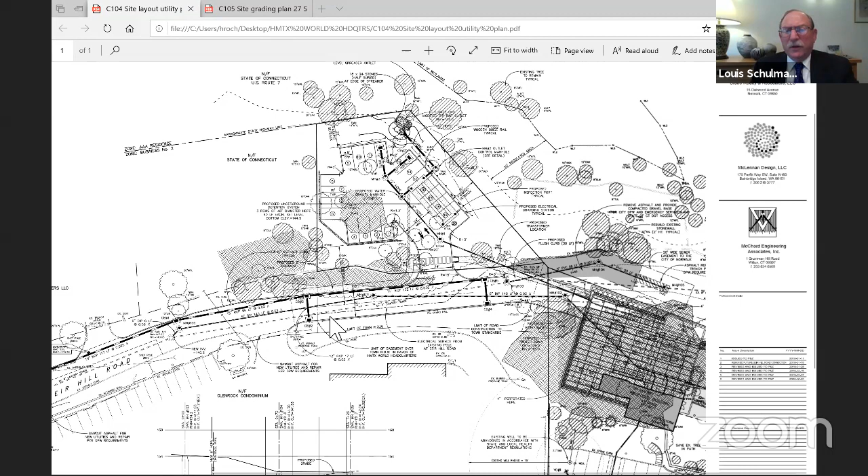Let me stop you, I don't know if other people are having the same issue. I'm not seeing your cursor. I agree. You might be able to change the color. Okay.

While Harry's trying that, I'll just orient you a little bit. Seir Hill Road runs from the left side of your screen, and then it continues north toward the right side of the screen. The roadbed ends on the left side of the screen, and we would extend that roadbed to a travel way that would come up all the way past the entrance to the parking lot. So that roadway is in the middle of the screen, if that makes it any easier to understand.

Harry: Right, and I don't see any options to change the color, so I'll just explain as I go. As Liz stated, the roadway does end right where the entrance to the condominium complex is on the bottom of the screen, right where it says CB2 and CB number 3. So we'll be extending from there to the arrival court of the HMTX World Headquarters building.

With the entrance to the 20 space parking area, we'll be providing turnaround for trucks and emergency vehicles, greatly improving the hammerhead turnaround that currently exists at the terminus of Seir Hill Road.

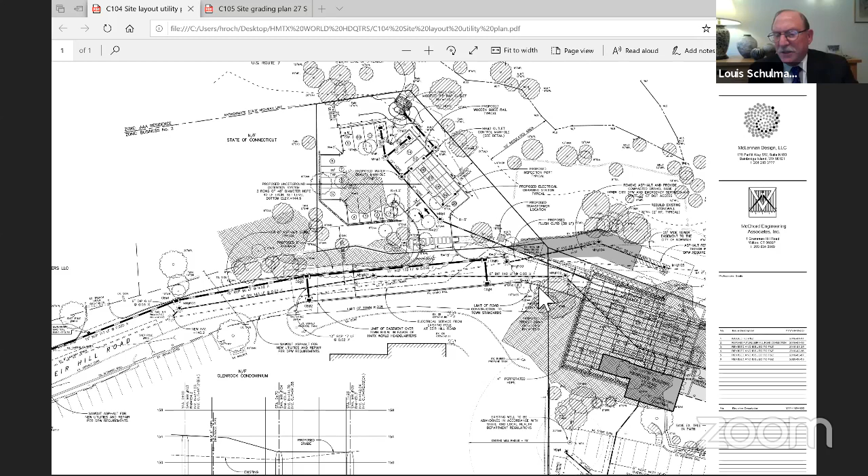Is there a grade separation between the new parking area and the Innovation Center? I'm sorry, what was the question? Whether there's a grade separation between the parking lot and the building itself. A grade separation, is that what you said? Yes, is the parking lot at the same grade as the building? Oh, no, it is lower.

As you approach the building, there is sort of a ramp up to the arrival court. And I could give you the elevations here: the building is at 160, and the parking area is at 150 to 152 as it slopes to the lowest point.

Also, along the same lines, we will be extending Seir Hill Road. It starts at elevation 150, and then as it approaches the proposed arrival court, it climbs up to the 158-160 elevation. There's a bit of elevation change as you approach the ridge on the 15 Oakwood Ave property where the building sits.

I'd also like to know whether Seir Hill Road will be public or private. Maybe Liz can expand on this. There is an easement that the roadway will be in, and a portion of it will be designed to city standards, so I believe it will be public for the most part, but Liz could confirm or correct me. We're working on the details, but we're contemplating an easement over a right-of-way that will be constructed to whatever standards the city wants for this type of roadway.

As far as it being an extension of the public street, the city will have the ability to come up, plow it, and we'll give it access and provide snow shelf areas. We're working on the details with DPW as we speak, and we should have those resolved along with the easement agreement and an easement map.

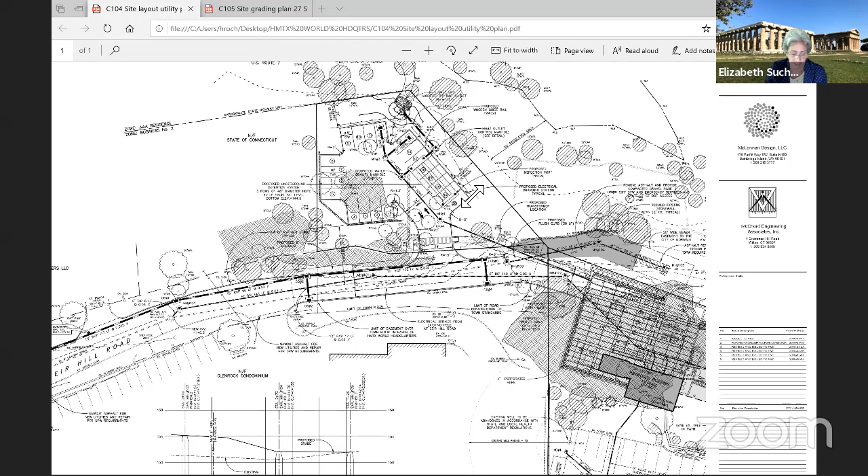So maybe at this point, could Dale or Brad come on and walk through briefly the modification changes to the Innovation Center? They're minor in nature—in addition to eliminating the parking deck, there's some revision to the configuration of the front entrance courtyard, some additional footpaths, changes to the raised boardwalk in the rain garden area, and some minor exterior elevation changes. I'll let Brad or Dale walk you through those, but feel free to interrupt and ask me any questions. Thank you, and I'll stop sharing my screen now so one of them can share theirs.

Thanks, Liz and Harry. This is Brad Banky, an architect from McLennan Design. We are the architect of record for the project. I will share my screen—let me know if you can see this, please. Yes, okay.

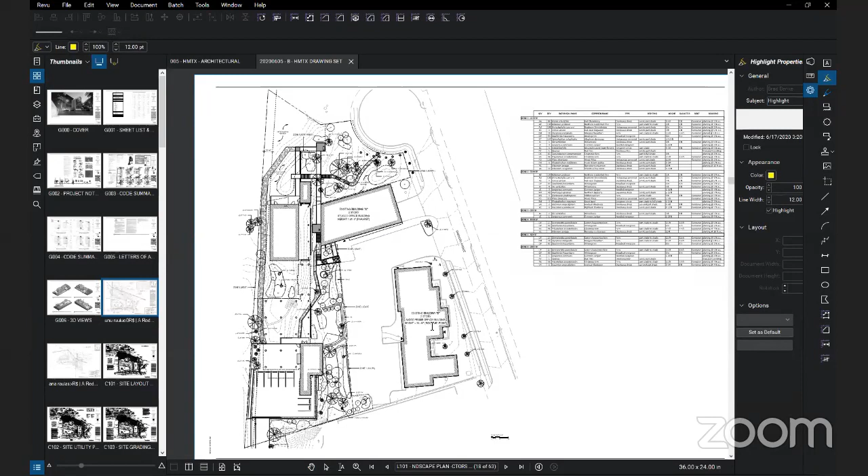So as Liz mentioned, since the last time you looked at this, there's been really minor changes to the building itself. Most of the significant changes have come to the site with the addition of the new parcel of land and the parking lot. Our building is oriented with north at the top of the screen now. These are two existing buildings on the property, and the new facility is located on the west side. The major difference on the main parcel is that the previous version had a circular turnaround as a front entrance plaza—we now show a rectilinear entrance courtyard leading down to the south to the additional extension of Seir Hill Road and the parking lot.

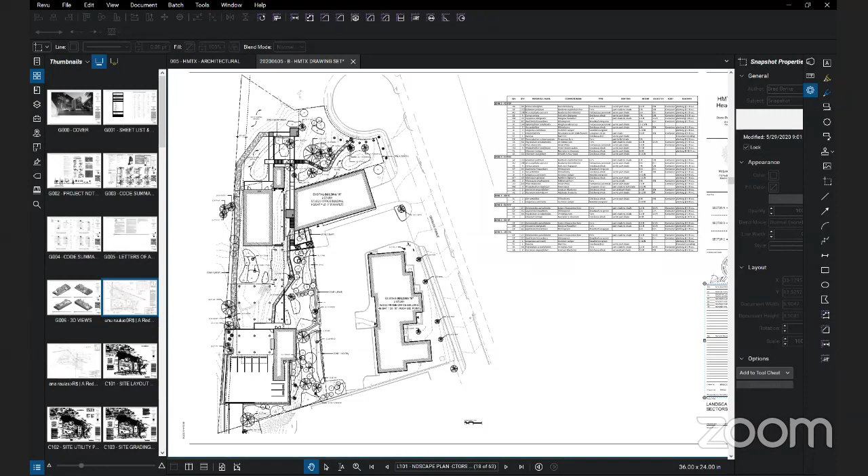There are minimal updates on all code related issues. The building height and average grade has not changed since the previous submission. Another significant site change has been the addition of site footpaths. Due to building code and egress requirements, we have a footpath that exits the building on the north side, and we also have fire access requested by the local fire department on the west side of the building so they can throw ladders there, while fire trucks would access from the east existing parking lot and the new south entrance plaza.

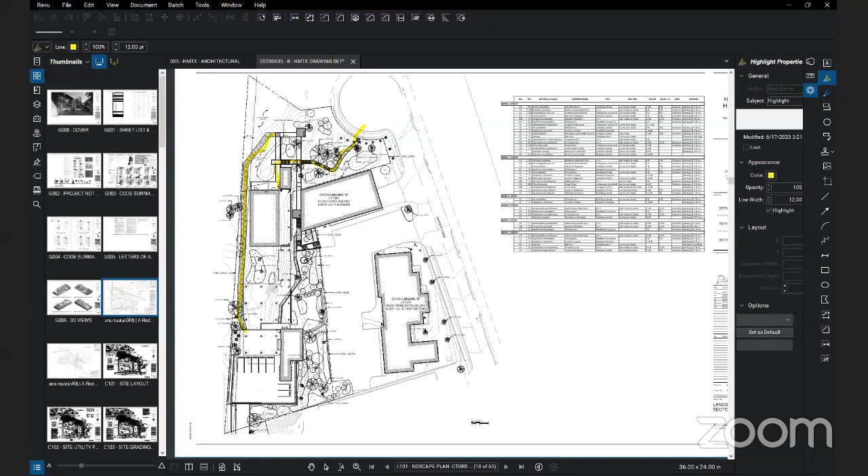Also, just minor landscape updates. The landscape design for the main parcel has pretty much not changed other than the addition of the footpaths. The new landscaping for the parking lot and the landscaping for the main property are pretty similar. We're preserving as many significant trees as we possibly can, removing several invasive species, and generally creating a beautiful, lush new landscape with native trees, plants, and pollinators.

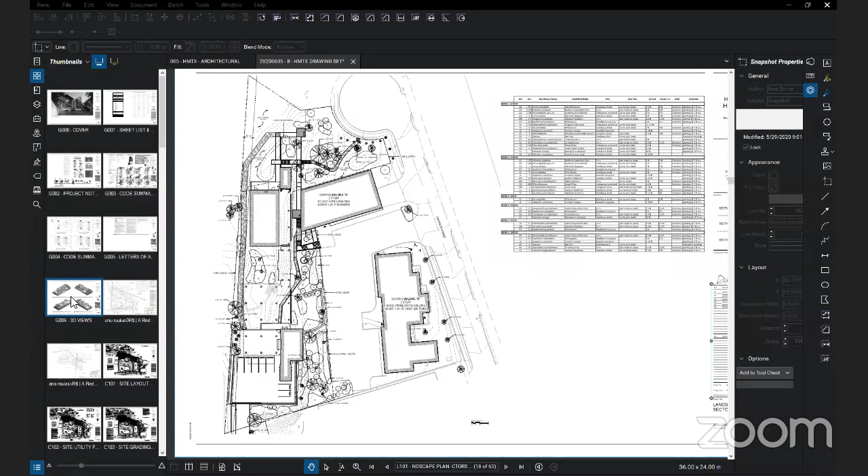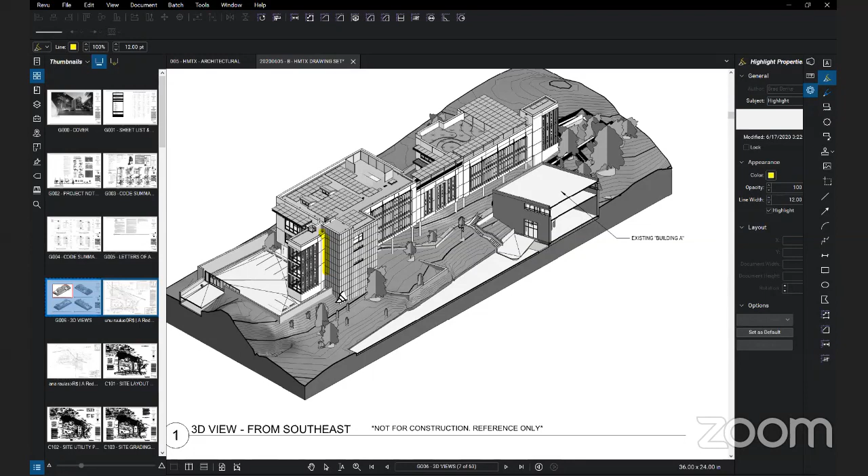The actual architecture of the building hasn't really changed—standard development to meet building code and coordinate with mechanical and electrical disciplines. The only exterior change worth noting: this is the building again, if you haven't seen it for a while—4 stories tall, spanning northways across the site. It used to be an entirely stucco building, like a white sand texture; now a portion of the building will be stone cladding. That's really the only significant exterior change.

We've added some details if you're curious to look through—the roof equipment screen, several exterior details for the rain garden, enlarged plaza plans, and lots of site features and details that I won't pull up unless there's a need to. We've also updated our electrical lighting and site lighting plans.

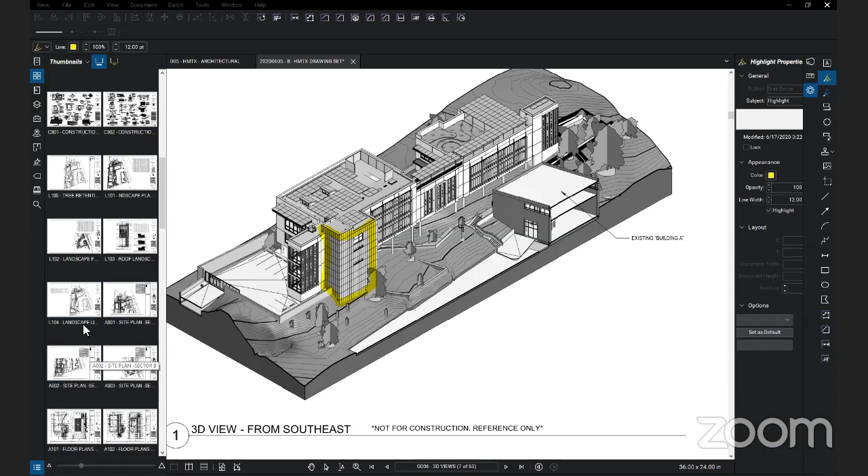One of them is on sheet L104 for the main property. Completely zero foot candles of lighting power spilling at the property edge across both parcels, so there's no light spilling off the site. And then the south parcel is on sheet E052.

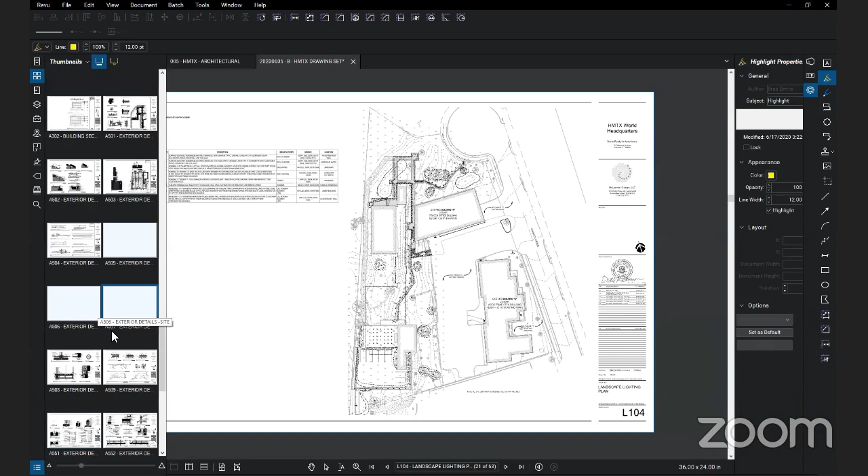Again, pretty basic site lighting plan with a couple poles and some smaller lights in the parking lot, again with zero light bleeding over the edges with full cutoff fixtures. The lighting plans are in the drawings as well as the electrical cut sheets to show the specific fixtures, if anybody has specific questions about those.

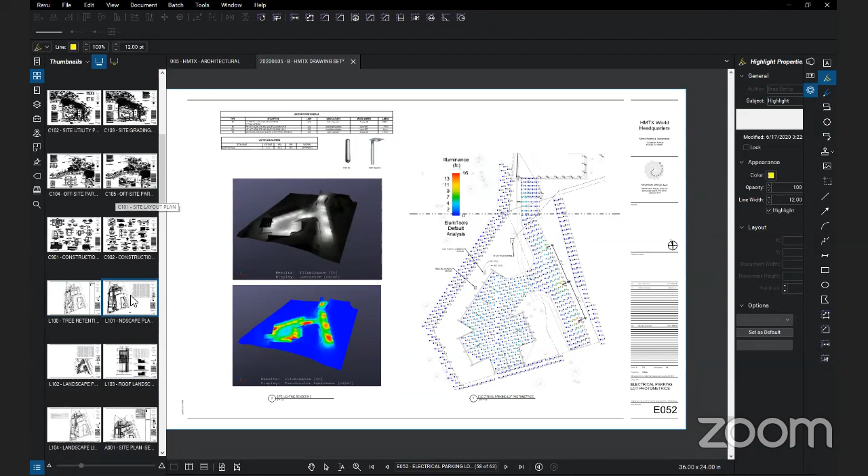That's pretty much the significant changes, but I will certainly answer any questions that might come up. We're really excited about this project, so thank you for your time. Questions from the commissioners? We don't have anything else to add or anyone else who is going to make a presentation this evening, but if you have any questions, happy to answer them.

From my perspective, the issue here is the community. As you know, when this was first presented, the commission was really very excited about it. The changes are more than nominal, so the question becomes: should we give the community another opportunity to speak about the project? And the fact that you were only contacted by one person after mailing out the information may suggest that there's limited interest, but I'd like to get feedback from the commissioners regarding that.

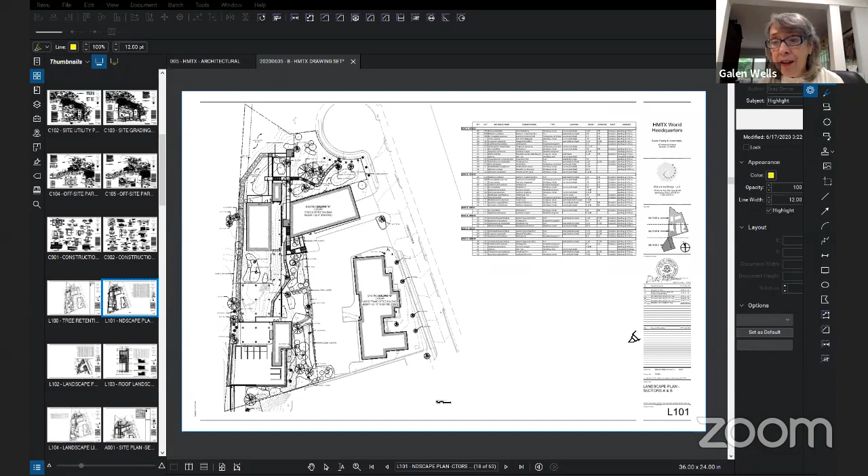Again, we have the authority to approve these things this evening and allow them to move forward. We also have the right to require a public hearing. My opinion is that these changes improve the plan. I think the parking lot is an improvement over the previous parking structure. It looks like the plan is improved. I think we could go ahead and approve it without a public hearing.

I agree with Galen. How much time was given to the public to comment? As I indicated earlier, the first set of mailings went out within 10 days of the initial submission back in March, so that was around March 19th, and I didn't hear from anyone. Then the latest set of submissions, which were filed around June 5th, the letters went out shortly thereafter. So the fact that I received an email and a phone call on Monday suggests to me that folks knew about it at least the weekend before.

In response to your comments, Mr. Schulman, while I appreciate the fact that the commission has discretion to hold a hearing, I call your attention to the fact that the parking lot fully complies with all of the requirements of the zone in which it's situated. Since it does, the commission has limited ability when faced with a site plan review application, if it fully complies, to do more than approve with conditions. I certainly wouldn't want to hold out hope to the public that by holding a hearing, a parking lot for 20 spaces could somehow be denied. I don't think it could be, I could be wrong. And I do agree with Commissioner Wells that a parking structure in between building A on the plan in front of you and building B is more intrusive and impactful than a parking lot for 20 up at the end of Seir Hill Road. But it's true, it is your discretion to do what you deem most appropriate for the neighborhood, and whatever your decision is, we certainly will abide by it.

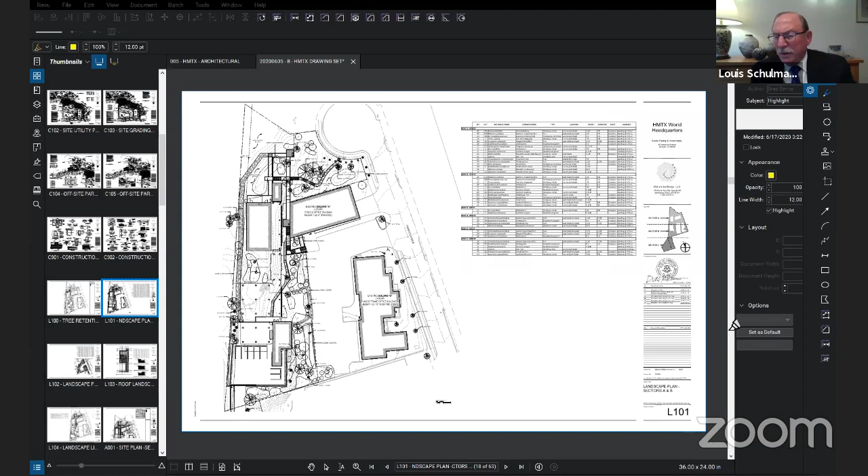Other comments from commissioners? Well, as it says, the applicant reached out to the public in March and in June, and they didn't get a lot of feedback. I don't really see any need to do a public hearing. The only question I have is for the second round of communications, was it clearly noted what the specific changes were so that people could clearly understand what had been updated?

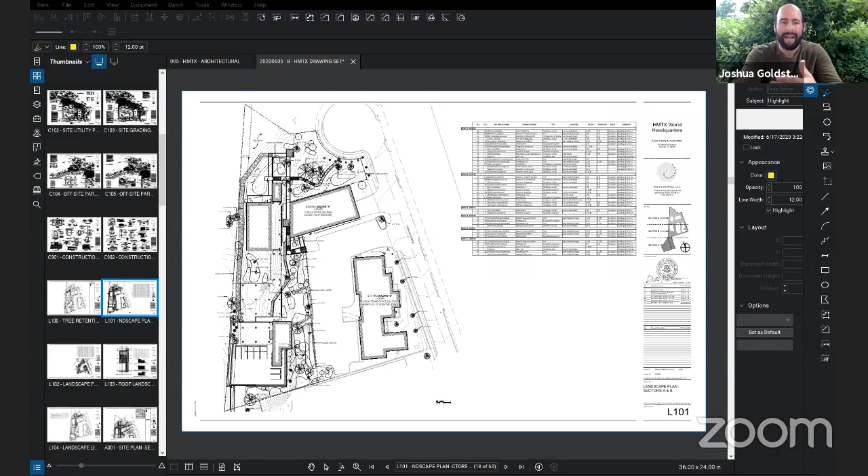I'm talking about the respective mailings. Was it clearly delineated what the changes were in a way that was easy to understand for people? I can pull up the letter if you give me a minute. But to explain, it was indicated that a site plan review application had been filed for a brand new parking lot for 20 spaces, with minor modifications to the building that had been approved 2 years ago.

Great, thank you. Steve, Liz, did you get any feedback from anyone regarding this meeting? No, we have not been contacted. As Attorney Suchy stated, we have all the application materials up on the city's page under a folder specifically titled for this application, as well as several other applications. No feedback, email, or phone call.

I would be prepared to vote, although this is really probably not minor in a sense to be considered as minor. I agree with Galen that it's an improvement. I think we all felt when this was presented to us that there was definitely a distinguished piece of architecture, and I think we'd like to see it go forward as soon as possible.

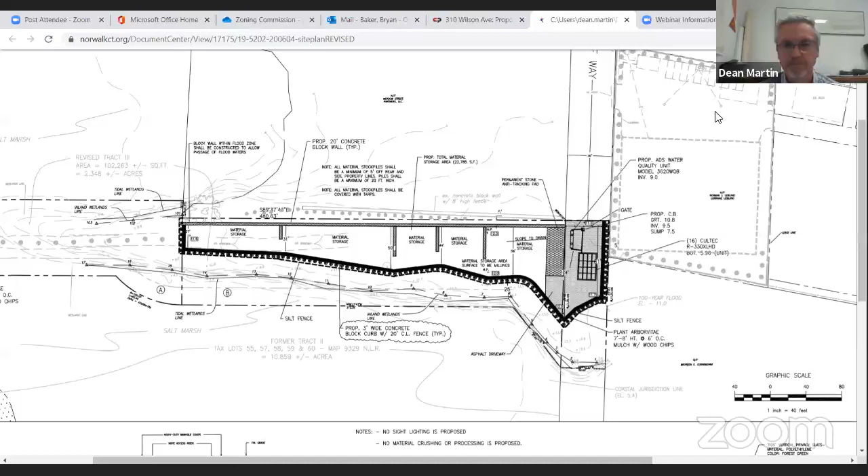Questions from commissioners? Commissioner Schulman, if I may, Dean, could you just chat about your interaction with the representatives of DEP? Sorry for interrupting, just wanted to make sure we got that on the record as well. Yes, yes.

Based on some comments from John Goucher from the DEP, he was inquiring as to whether any below-ground soil testing was performed in the area where we're proposing to install our stormwater retention system. We did do test holes and some permeability testing in that area, and that information was passed on to Mr. Goucher, and it appeared to be everything he was looking for. I did receive correspondence from him late this afternoon, and he has some suggestions about potentially installing select fill below our retention system to improve the soil permeability.

Attorney, at this point have you contacted the neighbors? Since an application for special permit and CAM was filed, we are required to notify neighbors, and those neighbors were notified in March when the applications were initially filed. To date, no one has contacted me. But since this is a special permit, a public hearing is mandatory, and we will of course be notifying neighbors once again within the requisite time period prior to the date of the public hearing.

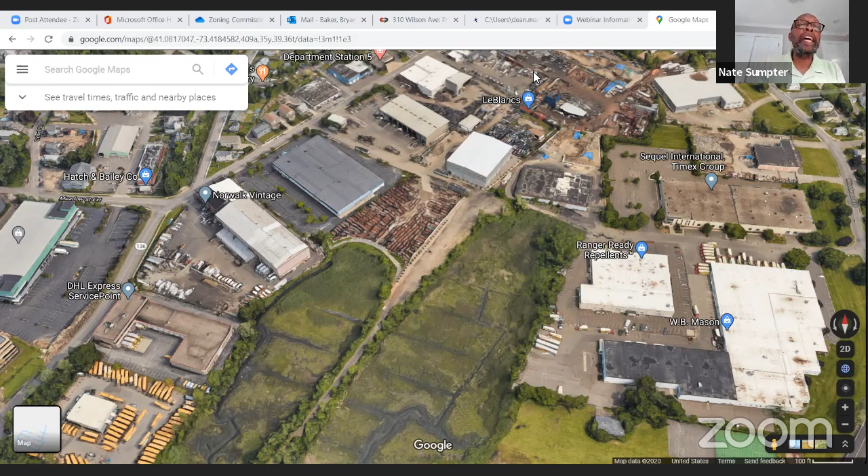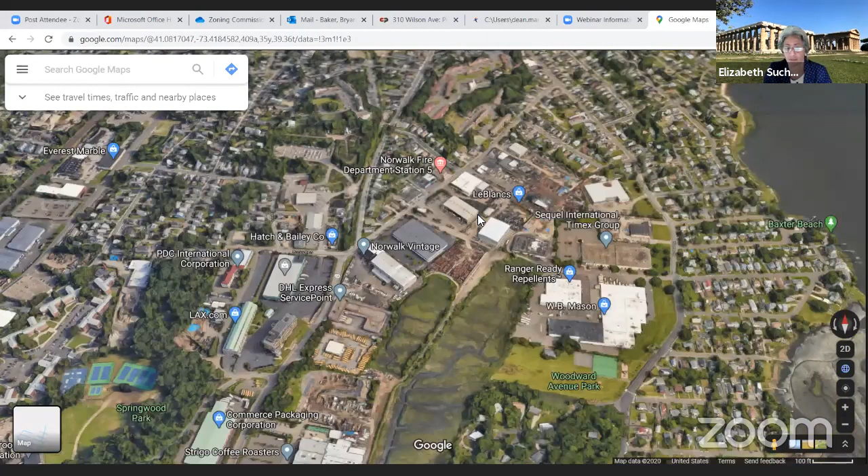As I look at this picture now, where is Village Creek? The residences are off the map. There you go, now you see where Village Creek is - the green area with the houses. Woodward Avenue Park is north of Village Creek. The parcel we're talking about is north of, above the arrow, where the arrow is right now.

Does that area flood a lot? Dean, I think you'll have to answer that better than I. No, the elevation of the site is above any flood level, other than the very southern tip of our proposed yard. Our property is around elevation 12 to 13, which is above the 100-year flood line, the 100-year flood elevation in this area.

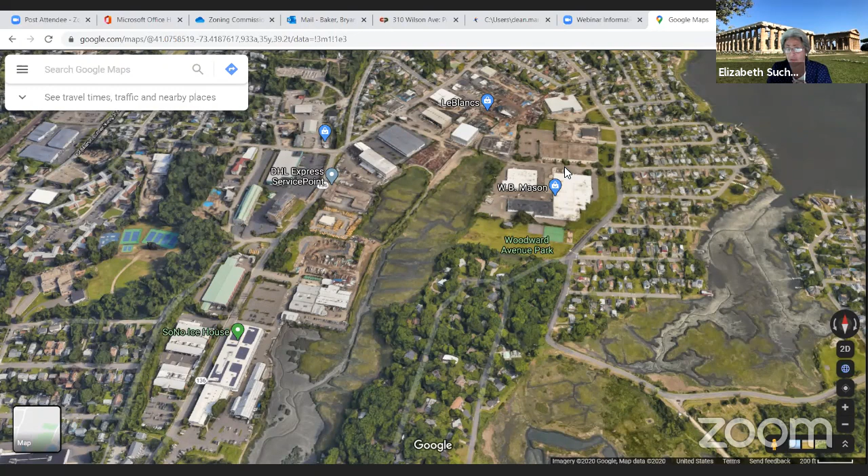And the purpose of this site would be to store - because I know you said it's outside as opposed to the construction that went on at Meadow Street which was inside - so what is the plan to store on the outside? Well, Mr. Sumter, you're absolutely right. The F&G building at 34 Meadow Street, the building on the interior, is used to create and crush the stone, and then there are stone pile storage areas approved outside. This is just to store processed materials from that building, giving them greater capacity to store outside. As mentioned before, it has to meet requirements of pile height, piles have to be covered, and it just gives them greater ability to store what they manufacture and create at their 34 Meadow Street location.

So they would store this in between what? When will this get stored there? Or what's the plan in terms of storing the process after it's been processed? Because what I'm concerned with is, when the trucks are bringing in material, are they planning on first dropping it there? Like if they're bringing large rocks, I've seen some construction going on further down the street and in Norwalk in general, and I've seen trucks coming over there. So would this be like a staging area, a dropping area? What exactly, and at what time, and what type of material? I heard you mention it, but I really don't know what you're talking about in terms of what you really want to store there.

Sure. This would not be an area where raw materials come and just get dumped in piles to then be processed. The idea is that materials to be processed arrive at 34 Meadow Street, are brought inside that building, and are crushed and compounded, or whatever the proper terminology is. Then that material is taken out of 34 Meadow. Right now it's stored outside the building. These other storage areas on this proposed contractor storage yard would be where similar processed materials are stored — not crushing it outside, not storing stuff that needs to be sorted. These are for materials already processed, stored in the appropriate bins depending upon size and type of material.

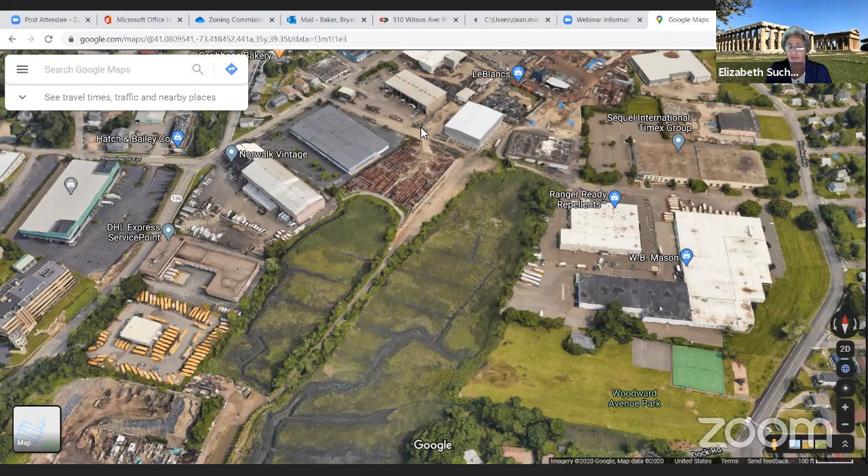The trucks have about a 15-foot wide travelway between the edge of the lowest portion of the pile, or whatever the phrase is — Dean has it, I don't remember it — but there's a travelway between that 8-inch curb, which is the concrete block that's somewhat underground, and the edge of where the materials are. There's approximately a 15-foot wide travelway. So trucks can bring the processed materials to be stored, and when they're needed to be brought off site to whatever jobs F&G Construction and Webb Construction have, they can then be brought off site to the job site.

So what condition is this processed material in? Do you have any idea, attorney? I don't know what you mean by what condition. There's small stones that you'll see. Yeah, it's typical stone. I can call it aggregate, but if you want me to give you some examples of it prior to the hearings, you can see it. Maybe that might be the best way to describe what it would be. That's always helpful to me to actually see what the heck this stuff is. But if that's helpful, I'm happy to do that.

Yeah, because I don't know what processed material is. I'm wondering about the amount of dust that's going to be in this material, and what it is, because I don't understand the need. What are they doing with it now when it's processed? Where does this material go once Webb have done their crushing — is it now taken away? It then goes to various job sites, whether it's state contracting jobs that F&G Construction has, or private contracting jobs. It's been used for road projects in Norwalk and elsewhere. It's a typical aggregate facility where the processed material is stored and then brought off site to construction jobs.

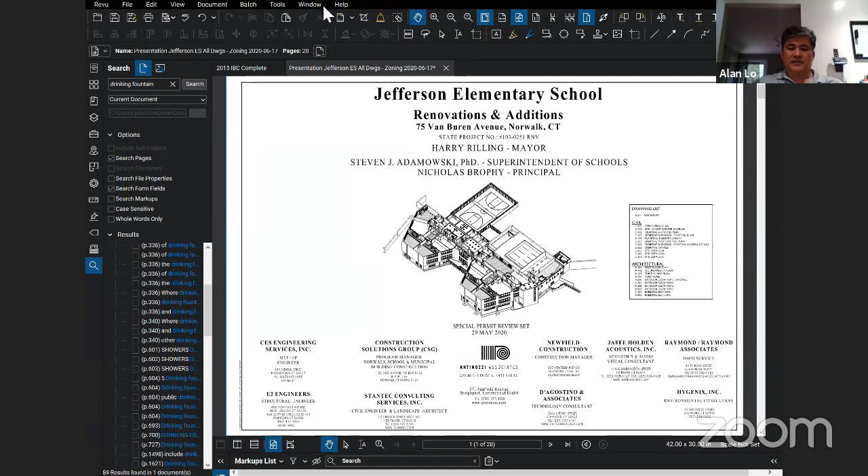So the proposal here is to do an addition for the gym. Also, if you know the property, there's where the bus drop off is, there's an overhang over it, and that, generally speaking, in today's world is not acceptable because of public safety. So we're infilling that portion, and we're adding pre-kindergarten classrooms on the lower level.

The population right now is a little more than 500. It's going to be between 400 to 420, so overall the population of the school is going to be decreased back to a neighborhood school level. We're also relocating the bus drop-off to the upper portion of the site so that we completely separate bus drop-off versus parent drop-off versus the teacher's parking. This way we provide the maximum safety needs between the drop-off area and pickup time.

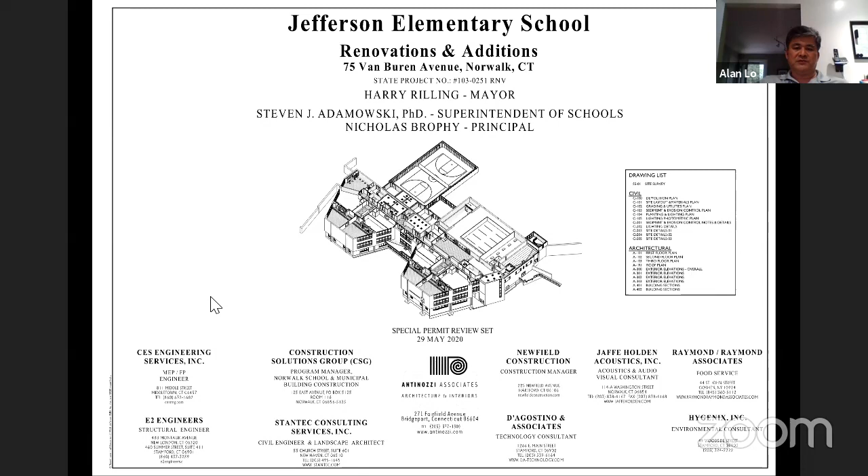Tonight I have my design teams available to present this. If you don't have any questions right now, maybe we can go through the presentation. I'm going to have the architecture team introduce themselves.

Good evening, everyone. My name is Michael Losasso. I'm an architect at Antinozzi Associates. I'm joined tonight with Lisa Yates, who's our project manager running the project for the Jefferson Elementary School. We also have representation tonight from Stantec, our civil engineering consultant, who'll speak to aspects specific to the site development, water quality control, and some of the vehicular revisions we've made to the site.

I think Alan has always, in a very brief but very complete way, introduced the project well. The only thing I would add before I turn it over to Stantec is that we're currently in the design development phase of the project. We expect to conclude that in July of this year. We hope then to continue into construction documents, which would be completed and ready for bid in early January of 2021. The bidding and negotiation period would span until about March 2021, and the forecasted construction period for the project would conclude in March, or let's say March-April, of 2022.

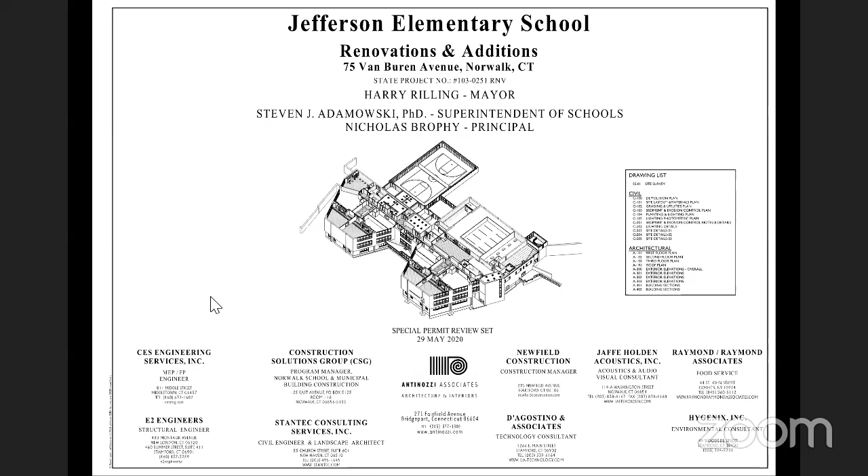Thank you, Michael. My name is Philip Katz. I'm a project manager at Stantec in New Haven, a licensed professional civil engineer. Let me orient you a little bit to the project, to the site.

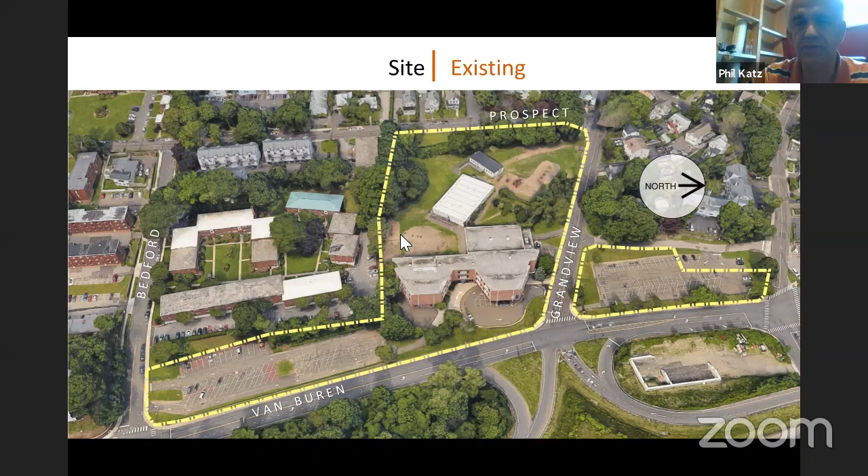Lisa, if you go to the next slide—this is the demolition plan. I'll start in the southern corner there by Bedford.

That existing parking lot, we're going to demolish and totally reconstruct. We're going to raise some of that grade to even it out. If you're familiar with the site, it comes off of Bedford, dips down, and then comes back up again to the school itself. We're going to have some excess material from the back as we do excavation for the new building, so we'll use that to raise the grade a bit. We're going to take out the parking and the driveway underneath the existing building, recapture that space—you'll see on the site plan what we're going to use that for. Then in the back, the existing portables will be removed, and the playground will be removed and reconstructed.

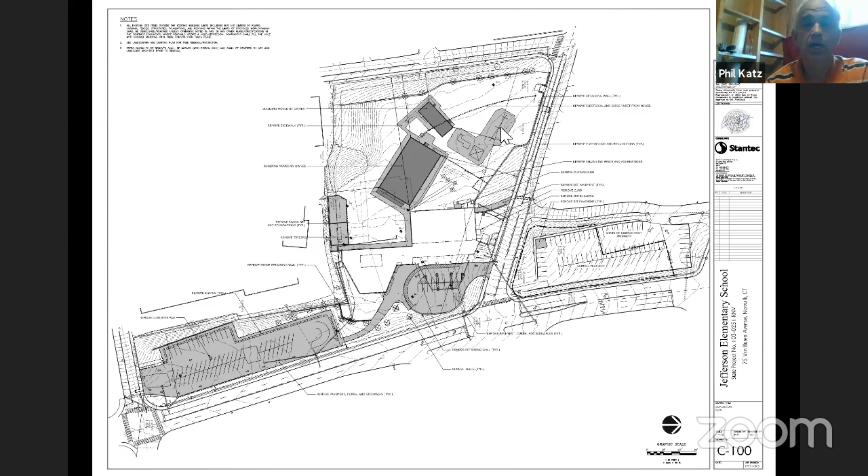Next slide. Phil, before you move on, I want to point out a feature specific to safety. If the commission can see the series of dots—they're essentially little rectangles that run along the length of the parking on the south or left side of the sheet—those were installed as a means of providing a safe travel path for pedestrians on the site, particularly those coming from Bedford and conveying to the main entrance of the school, which is located on the east side of the building.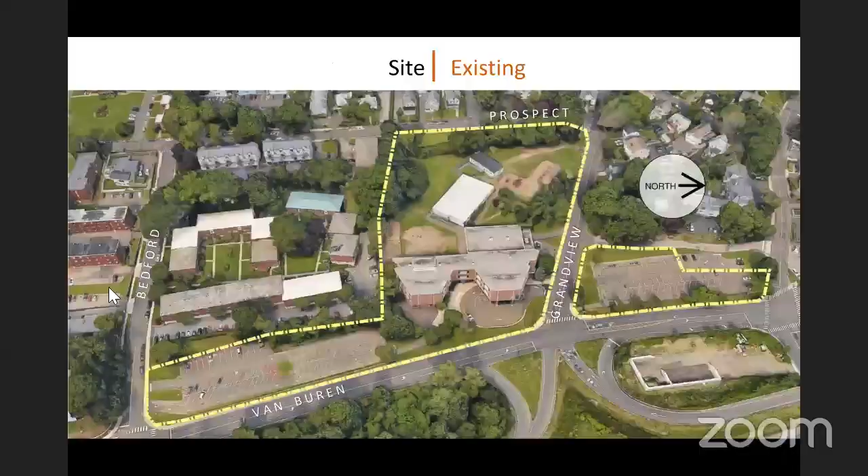And it's relevant because this school has a very large neighborhood presence and a large walker population. So part of the improvements that Phil will continue to describe, we'll talk about much of the safety aspects related to pedestrian travel.

We're going to create a plaza that kind of welcomes students to the building and gets them into the main entrance. And as Michael was sharing, we are creating a separate sidewalk along the west side of that parking area to replace the walkway that's kind of bordered by those concrete blocks.

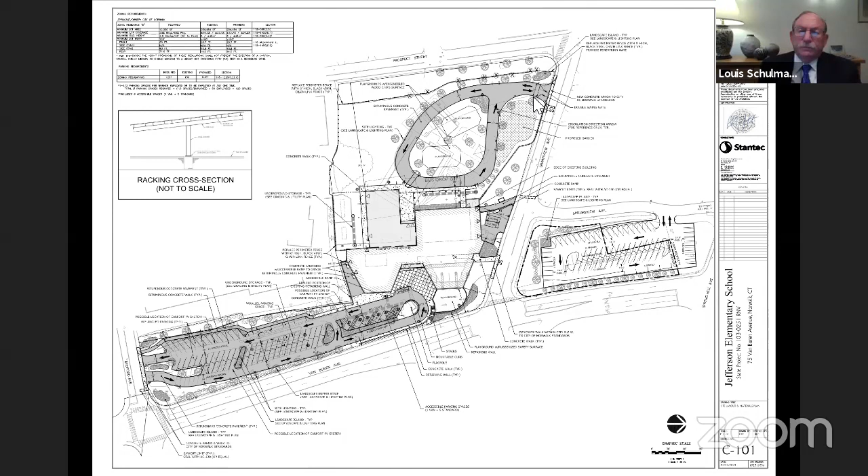Then as you're coming up Grandview, we're going to create a new driveway, and that's for the bus loop. Again, that'll be gated, so it'll only be open during drop off and pickup. The rest of the time during the school day it will be closed, so there will be no vehicle or pedestrian issues while the kids are in school.

We're going to create some playgrounds in between that bus loop, and then keep going easterly. You can see the addition, the gym addition, kind of tucked in there by the building. We'll have sidewalks outside so as they get dropped off of the buses, they can congregate and then get into the building that way.

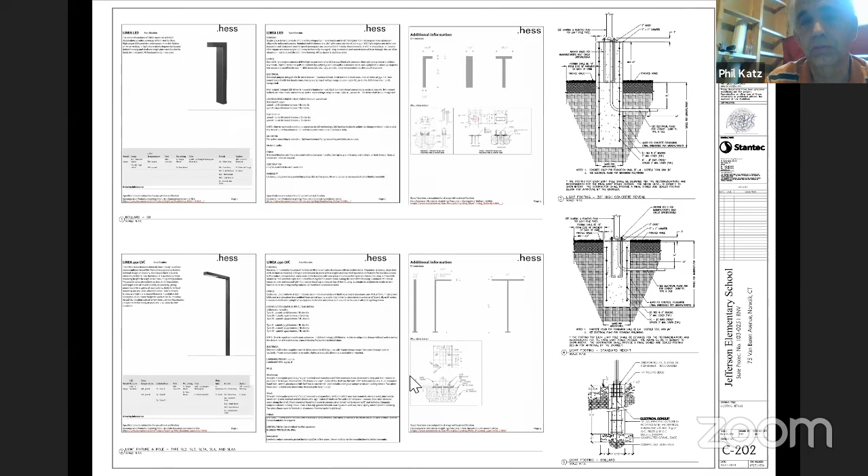One other aspect I'd like to touch on, Lisa, I don't know if you can revert back to one of the site plans. The separation of the parking to the lower level and the bus loop to the upper level was another deliberate safety aspect.

Phil has already described it, but the parent drop-off occurs on the lower level. There's some associated parking there as well, and the bus drop-off happens at the upper level. After the school is occupied, or during, when school is in session, visitors would only be allowed to enter the building at the lower level. Lisa will begin to walk you through the building and describe some of the safety features that have been incorporated in the new school associated with the separation of the public entrance.

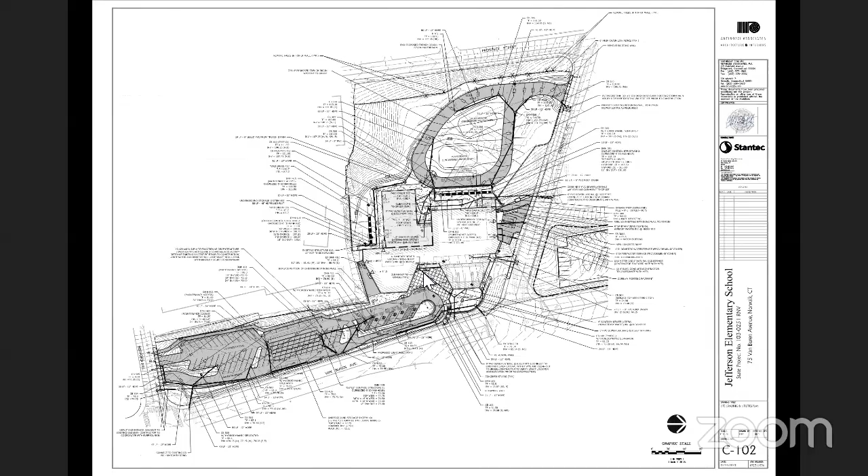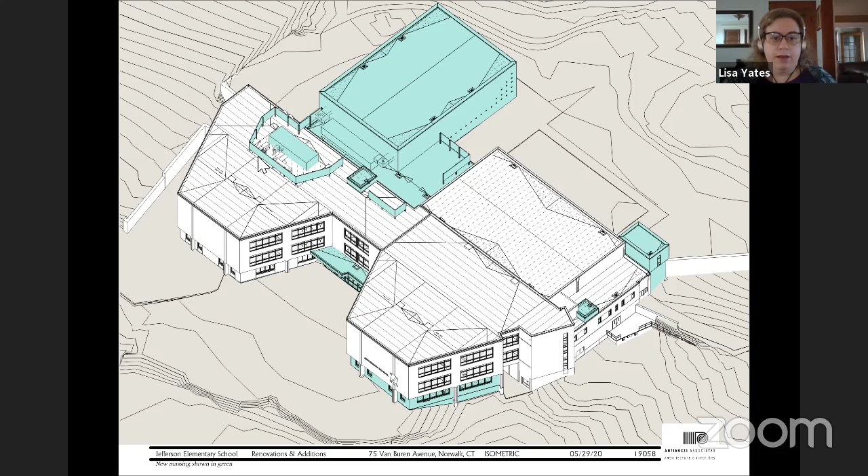We are showing screening on the roof. In a minute, I'll show you proposed PV panels for the roof as well.

So this is a view from the northwest side. This is the gym addition as well. The total height of the addition above the average grade plane is around 45 feet. As you can see, this is a good way to look at the really extreme grade change—two stories from the lower level up to this terraced area in the back. The gym itself is roughly 30 feet above its own grade plane, but it is the highest point of the building, which gives us the technical 45 feet.

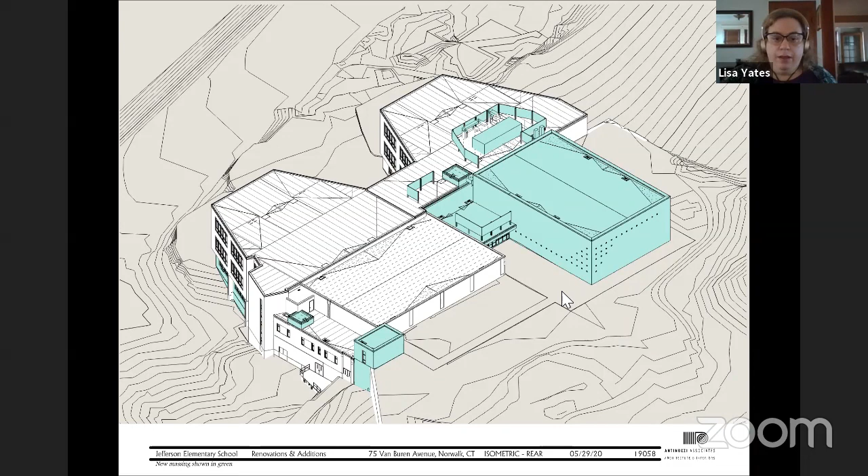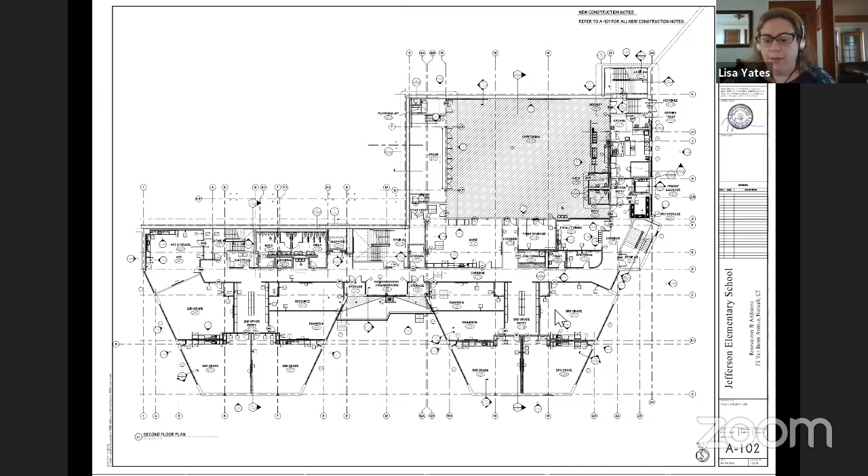This is the potential alternate for another stair. And then at the third floor, this is the cafetorium below. So we go up in grades—the second floor was second and third grade, the third floor is fourth and fifth grade, but the configuration is very similar.

And then one of the features of the new gymnasium addition is that it's easily locked from the rest of the school, which could allow for community use of the gym without having people go the whole way through the inside of the school.

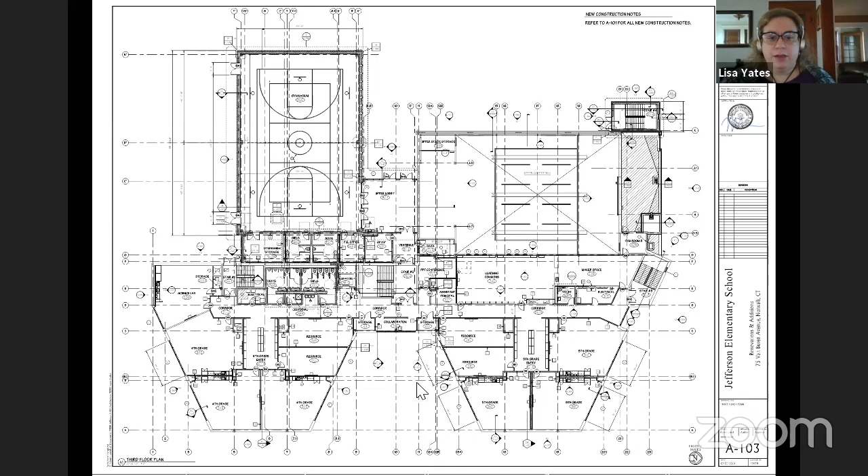I can show you a couple of building sections—oh sorry, roof plan. The roof plan, I think, is sort of iterative of the isometrics. So this section here is cut east-west looking north. This is the gymnasium area above, and then the entrance is in this general area.

So that's about it for the presentation. I can easily back up to address specific questions.

This is Alan again. Closing, I just wanted to say that Jefferson is going to stay in the Ponus School for two years, starting this fall to fall of 2022. Then they move back, and once they move back, the actual gaining of student seats actually happens two years from now. So of all the effort that we put in to create a space for elementary students, it takes a long time. Ponus's been going on for like two years now for construction, and then we've got to wait two more years in order to work on Jefferson, to gain any slots, open space to meet enrollment issues.

So anyway, we're open to any questions that the commission may have.

Questions? No, not me. Alan, what action are you looking for from us tonight? I would defer that to Brian and Steve, I guess. We're asking for special permits, to require we go to a public hearing. Yeah, to schedule a public hearing.

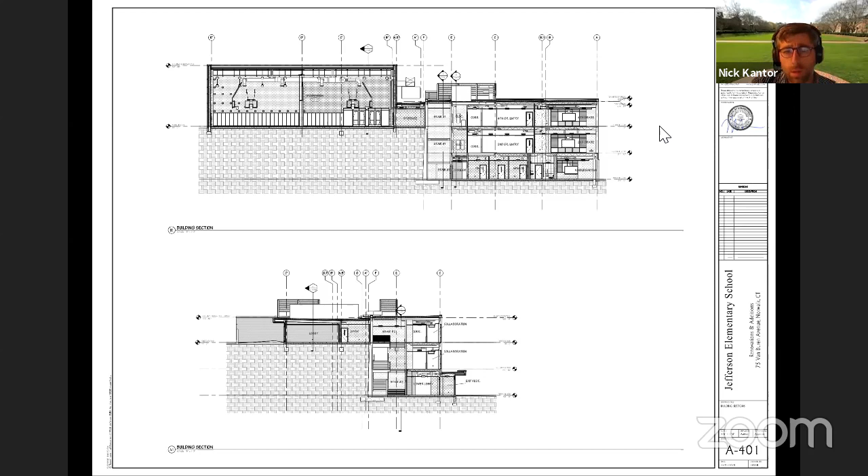Lou, I have two questions. Go ahead. How much capacity did you say this is going to add to the school? This project actually does not add any capacity to the school system. It's really Ponus that's going to add enrollment. So what we did is we spent about $43 million on Ponus, and we finished by August this year.

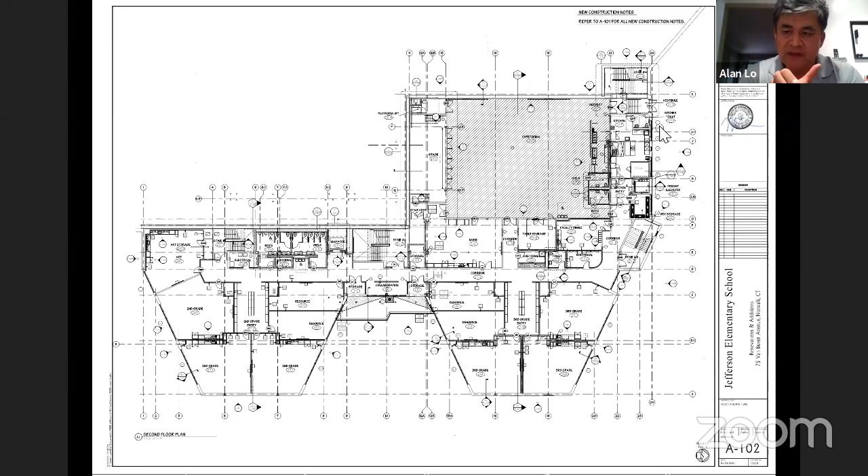So we renovated existing Ponus. We created a lower school at Ponus. The lower school has about 450 seat capacity, but we're using that as swing space for Jefferson. Gotcha, so it'll shift around. Right, so the net gain actually doesn't happen after we finish Ponus. It actually happens when Jefferson is finished.

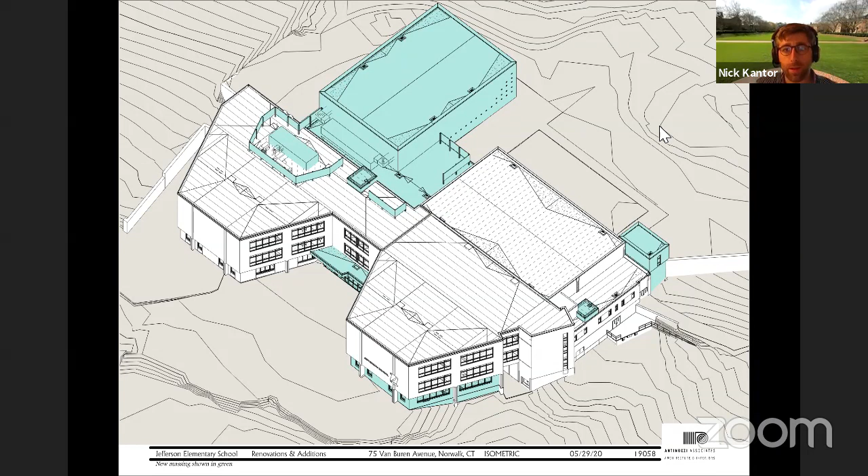Right, that makes sense. And then the other thing was, I love that you were thinking about the solar in the parking lot and on the roof potentially. I think it's great that the city's taking the lead and leading by example on that. How much capacity are you thinking you'd get out of the roof capacity and the parking lot? Since you mentioned solar, I don't know the answer, but we can get it for you.

Okay, but I don't want to take up too much time, but I do want to explain something here. The way solar works for the city is that financially, the city does not buy the system. We actually lease the system because we work with solar developers and lease the system for solar because they get tax credits. The city, as a non-taxable entity, can't get tax credit. In order to make it financially feasible to do a solar system, we had to go privatize. So the solar piece is actually a separate project from this project, but we are designing this building with all the capability in terms of electrical closet, the space, and conduit run to the roof and stuff.

That's all planned for the building. So at this point, there's still negotiation with the contract with the solar company. At this point, the probability of the solar happening here, I would say maybe 90%. So there's still like 10% risk because it's all financial issues. I'd say 90 to 95% chance we're going to have solar on this roof. We're narrowing it down right now, and Ponus we're finishing up, and we have a draft contract with the solar developer already. So this would be our third school that we will look at solar.

And the other thing we've been asked to do is consider carport solar panels. We proposed here, and I want you to know there's about a 90% chance that doesn't happen. Basically it's economics. What happens is that when you put a solar system on a roof, it's basically a rack system, you bolt it down, and that's it, right? So there's no real structure to it.

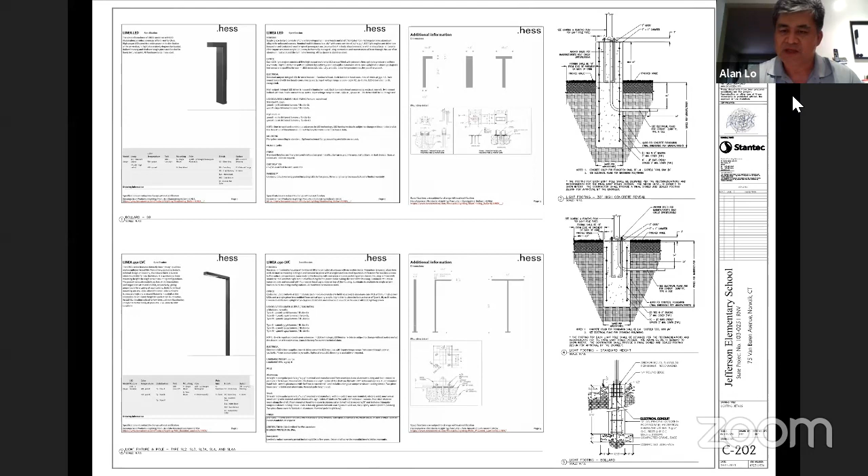But when you do a carport system, you've got to build a foundation. You've got to do a support system, cantilever out. All that adds a lot of capital cost to it, which they depreciate over 20 years. So the initial number we're getting is basically break even. So we've got to look at feasibility—do we want to do it even though we're not saving any money? And also the other problem I have physically is that we have to put the retention system in the ground, and the only place we can put it is in the parking lot. But at the same time, if we're going to put the panel and foundation there, it creates a design issue. So for your information, there's probably 90 to 95% chance that we will not do it, but we want to keep this option open as we evaluate, because they have to go through ZRECs, from Eversource, to see what the financial incentive is.

That background is really helpful, I appreciate that, Alan. Thank you.

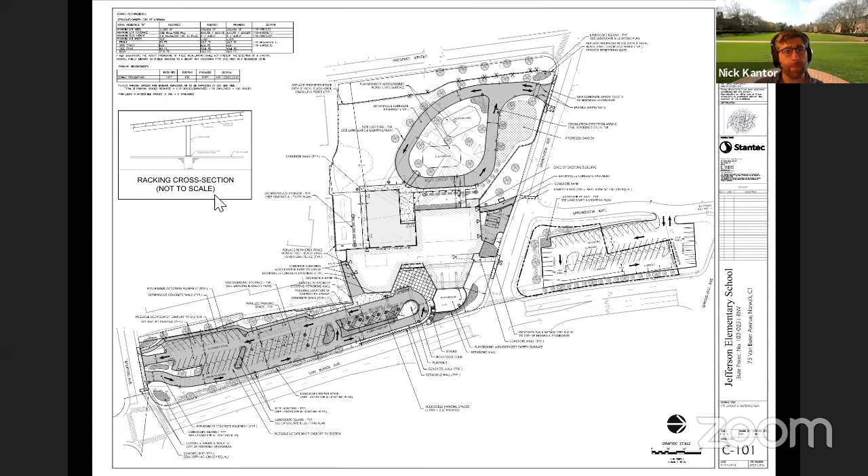Alan, we do actually have—I'm sorry—the rooftop system preliminary figures we received from the solar company we've been working with are 120 kilowatts.

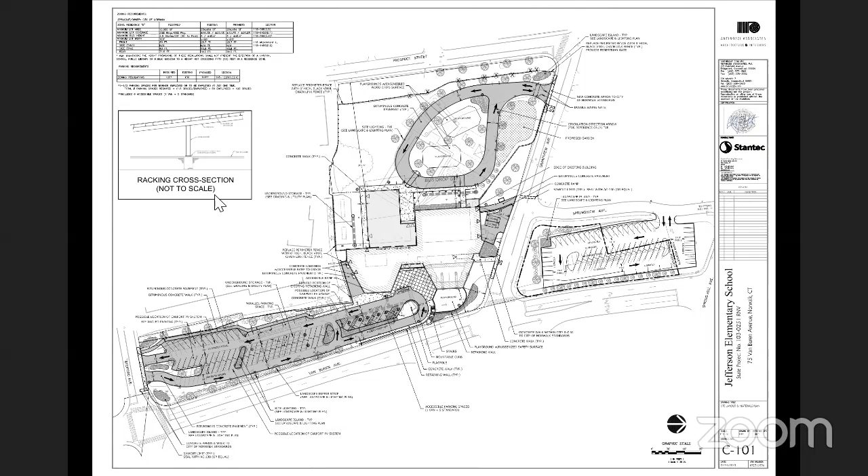That's the peak generation, and the building peak use is about 400 kilowatts, to give you a sense of what kind of offset the PV might provide.

Thank you, that's really helpful. Yeah, Nick, just one, I'm sorry. I just love to hear myself sometimes. No, I just want the zoning commission to hear me about something.

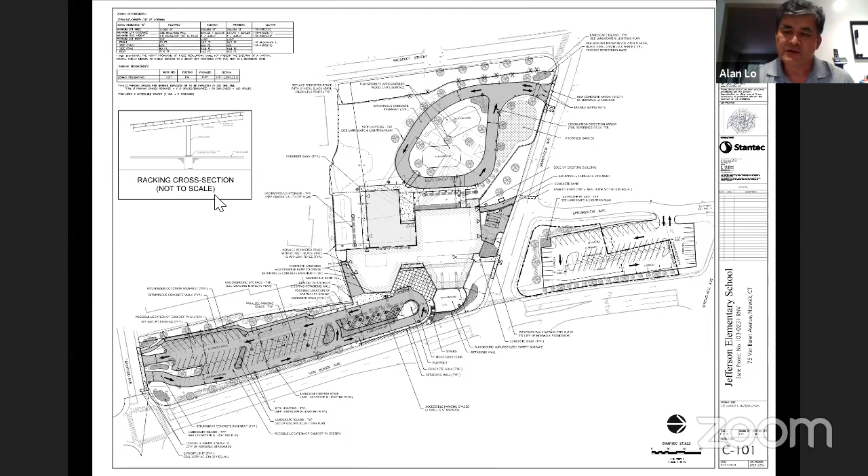Part of zoning regulation requires rooftop units to have screening. When we do a solar system, I think the zoning commission should look at how that affects solar systems on a roof, because the solar system is about 4 to 5 feet high, so in a sense it's already covering part of that mechanical equipment. Also, the solar system is part of mechanical equipment itself, so do you have to screen that? Once you put screening around those units, you create more shadows, and it reduces our ability to maximize the roof area. So this is a sidebar on our request, but we're showing the screening and showing the solar system. At some point we have to work that out. The zoning regulation at this point doesn't help us address that, because we're still required to put screening in front, and that creates shadow lines, so we have to put fewer panels. But technically, will the screens cover the solar panels too? I don't know. So this is something the zoning commission needs to look at in the future.

Just to comment, Alan, it's not going to help with this project, but the commission is in the process of hiring a consulting firm to help us rewrite all of our zoning regulations. One of the items several of us feel is important is environmental issues like this, the use of green infrastructure, which at this point really needs to be written into the code. So that may not be so far away, maybe shortly before you retire.

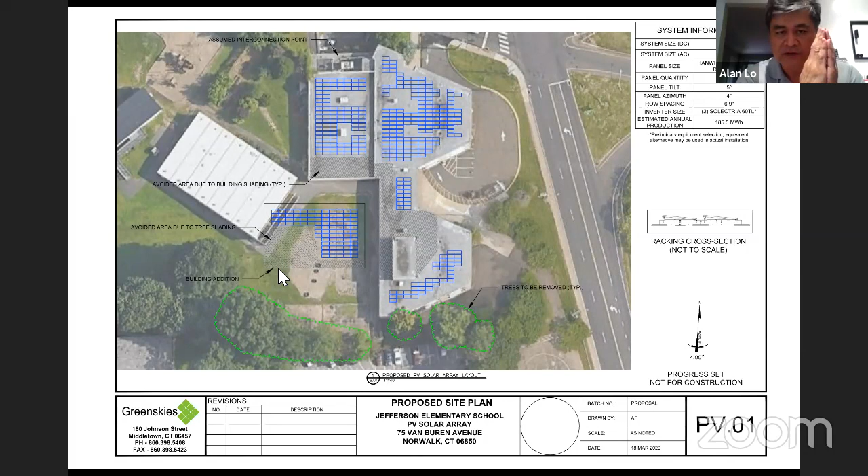Other questions from the commissioners?

Steve, any comments? No, nothing for me. Brian staffed this application, so I don't know if he has anything additional to add. No, I'm all set. Okay.

Now, Alan, you've asked not to have to do a traffic study because the volumes for the new school are actually going to be lower than they are for the current school. Is that correct? That's correct. And also we're bringing the bus loop further away from the intersection, which helps the intersection more. We submitted this to the state, and even though this is on Van Buren, which is part of the Route 1 system, they're not requiring us to do a traffic study.

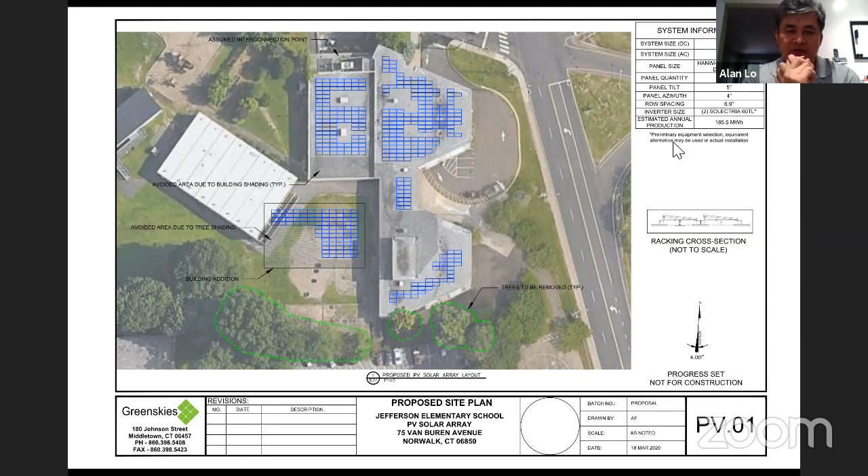Again, exactly what you said, because the population dropped from 500 - actually before it had more than 500, probably 550 or so. Right now it's about 500, we go down to 400. So in terms of parent drop off, that's further reduced from what we have now. We're trying to save a couple of bucks here because it's just a traffic count, for a project that's designed to reduce population and improve access.

Steve, we have the authority to take that action, not require a traffic study? Yeah, I believe so. I think that's a reasonable request based on the proposal.

Okay, then a date for a public hearing is the next item. Yeah, I think we follow the same path as the previous application, they would be on the same schedule. So we'll have a second public hearing, assuming that meeting's July 15th, a second public hearing that evening? Correct. The commissioners all comfortable with that? Yep. Yes. Then you'll be on the agenda for that July meeting. Thank you very much. Thank you.

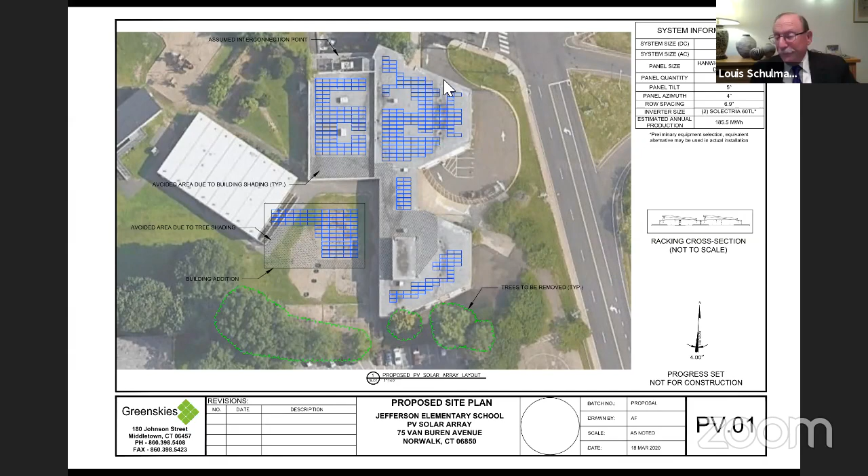Okay, the screen is much less complicated now.

Update on the East Norwalk TOD. Stephanie's not here, Steve, you're going to report? Sure. I think I emailed out the link, a drop-down file - you could pull the plan off. We did get the plan posted on the Norwalk Tomorrow page today. We have a public presentation of the plan scheduled for July 1st, and we're going to try to do an evening one and a daytime one as well. We're getting close to the 4th of July holiday, so we're trying to figure out whether we're going to affect people's travel plans or not by that. So we're going to work on that, and on promotion of it.

I expect there will be some public pushback from a core group in that area that does not want to see some of the changes we proposed. I think the changes we proposed are pretty modest for a TOD area on a main line to Metro North. Basically, in a nutshell, that East Avenue stretch from the train station up to 95 looks the way it is because of existing zoning regulations that really constrain you from doing anything else, so there's no incentive for anybody to improve their property. I think what we've put in place will hopefully spur some growth and development and really enliven that area. We're cognizant that there are issues with traffic in that area now, and we're hoping that the street improvements implemented as part of the Walk Bridge program, as well as the East Avenue widening, will ameliorate a lot of those concerns.